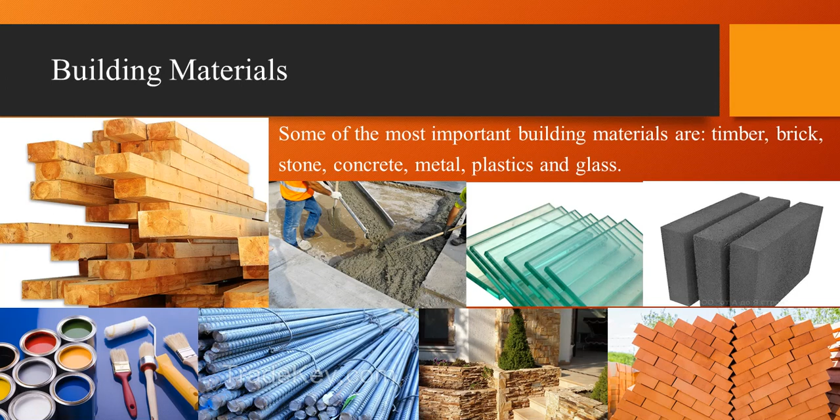First of all, let's speak about timber. Timber is provided by different kinds of trees.

Timbers used for building purposes are divided into two groups called softwoods and hardwoods.

Timber is at present not so much used in building construction as in railway engineering, in mining, and in the chemical industry, where it provides a number of valuable materials.

However, timber is still employed as a building material in the form of boards for the interior of buildings. Plywood and veneer serve a number of purposes.

Pay attention to the pictures. There you can see timber, древесина.

And we can say that timber is used in building sphere very much.

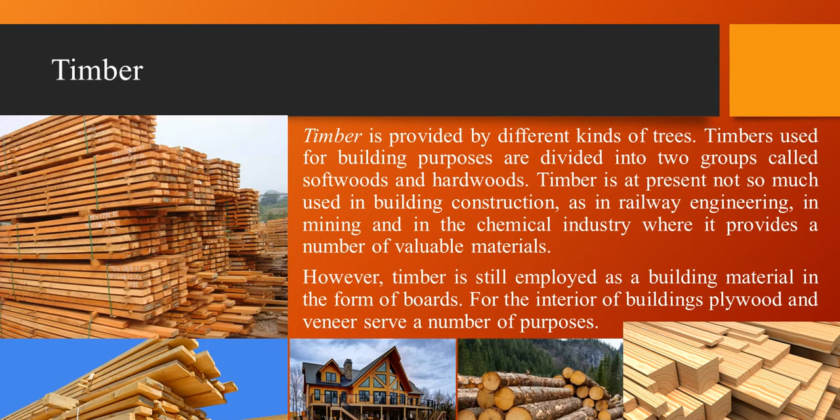Now let's speak about brick. A brick is best described as a building unit.

It may be made of clay by molding and baking in kilns, of concrete, of mortar, or of a composition of sawdust and other materials.

In shape it is a rectangular solid and its weight is from 6.5 to 9 lb.

There exists a variety of bricks for different purposes: ordinary, hollow or porous, lightweight, multicolor, bricks for decorative purposes, etc.

Bricks are usually laid in place with the help of mortar.

The shape and convenient size of brick enables a man to grip it with easy confidence, and because of this, brick building has been popular for many hundreds of years.

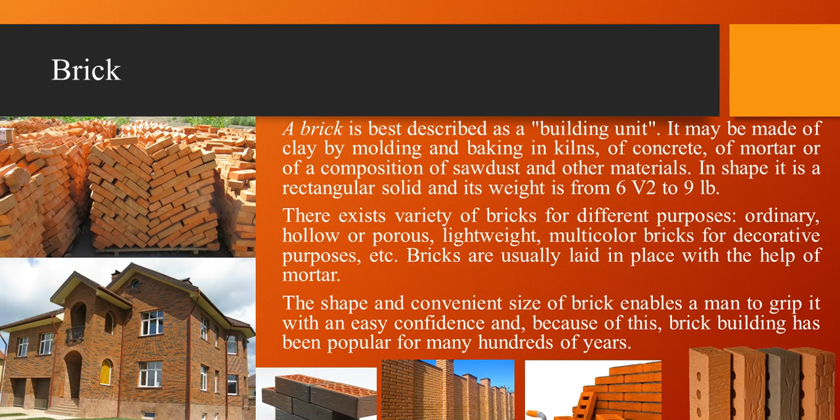The first we have spoken about. Remember now about brick and go on speaking.

The following material is stone. Natural stone is used for foundations and for the construction of dams.

The main varieties of building stone are basalt, granite, marble, sandstone, and limestone.

Also, you can see these names, these kinds of stones in this picture.

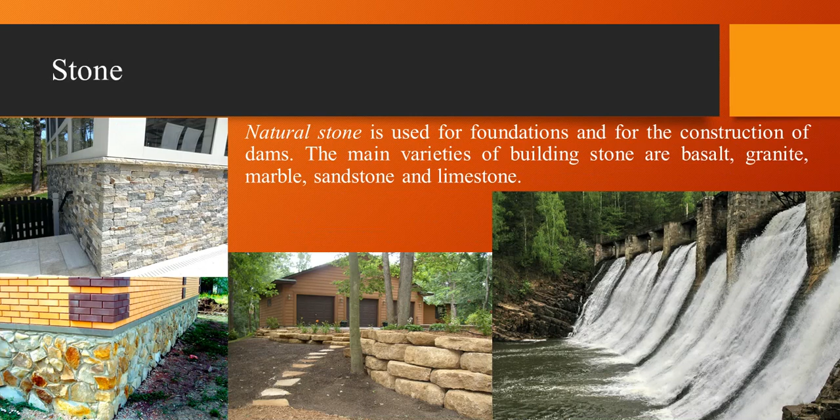This is about stone. Metals, aluminium,

principally in the form of various alloys, is highly valued for its durability and especially for its light weight, while brass is frequently used for decorative purposes in facing.

Steel finds its use in corrugated sheets for roofing, for girders, frames, etc. Various shapes are employed in construction.

Pay attention to the picture. Also, in every picture you can see that metals also play a very important role in building.

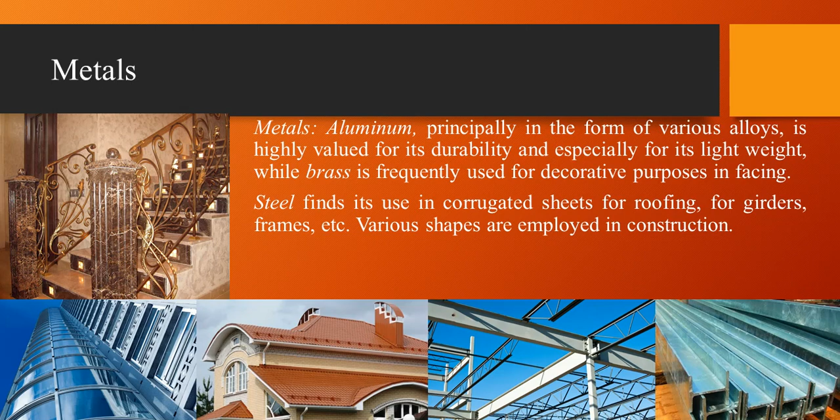Plastics. Plastics are artificial materials used in construction work for a vast number of purposes.

Nowadays, plastics, which are artificial materials, can be applied to almost every branch of building, from the laying of foundation to the final coat of paint.

Synthetic resins are the main raw material for plastics.

Plastics have some good advantages, and they are lighter than metals, not subject to corrosion, and they can be more easily machined. Besides, they are inflammable.

They can take any color and pattern, and they are good electrical insulators. Moreover, they possess a high resistance to chemical action.

A lot of decorative plastics now available have brought about a revolution in interior and exterior design. But plastics are used now not only for decoration.

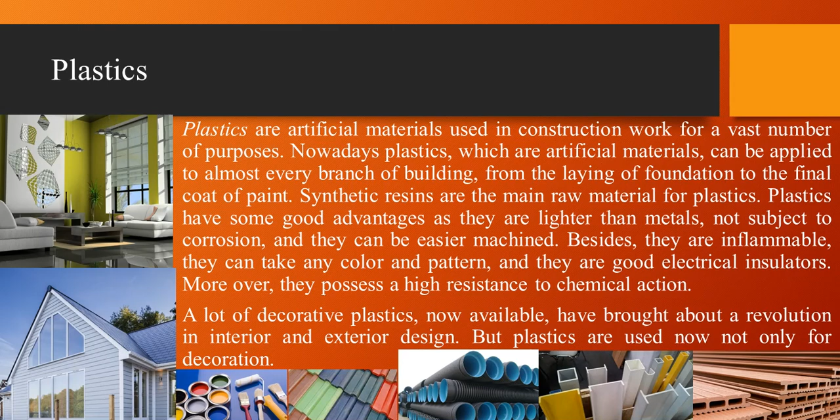Pay attention to the picture also. There you can see the ways of using plastics. For example, for decorating.

Also, in different colors, you can see this kind of material, plastic, used for our house.

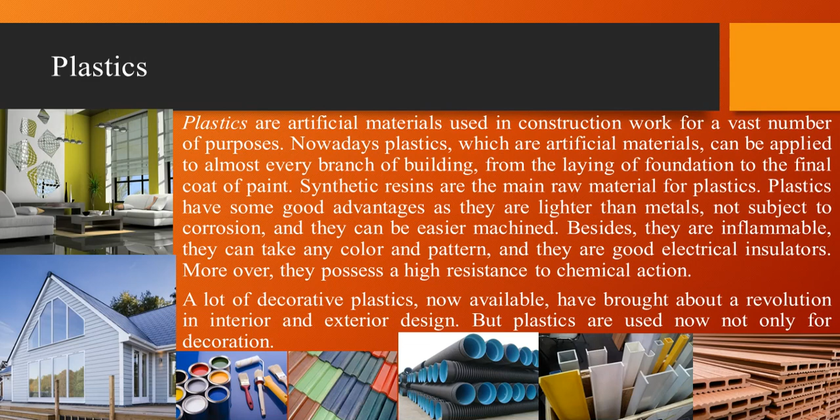Laminate. Also, laminate is used in building sphere very much.

Laminate is a strong material manufactured from many layers of paper or textile impregnated with thermo-setting resin. This sandwich is then pressed and subjected to heat.

Laminate has been developed for both inside and outside use. It resists severe weather conditions for more than 10 years without serious deformation.

As a structural material, it is recommended for exterior work. Being used for surfacing, laminate gives a tough surface.

Also, laminate can be made in different colors, and it gives a very beautiful picture.